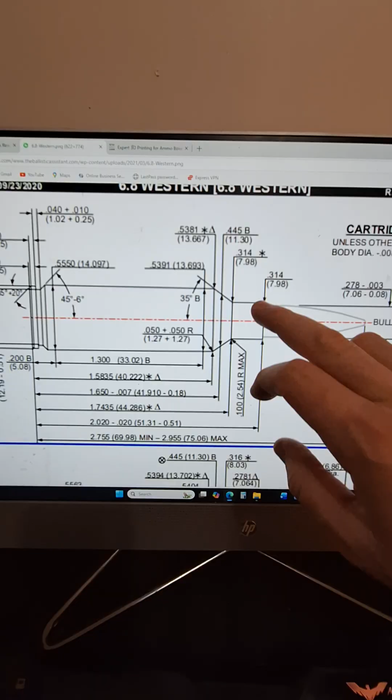I'm using the 6.8 Western schematics from SAAMI as an example to show the numbers of the tolerances I'm talking about. Down a little bit. There we go. So that's the case, and that's the chamber. So from the top of your neck to the bottom of your case,

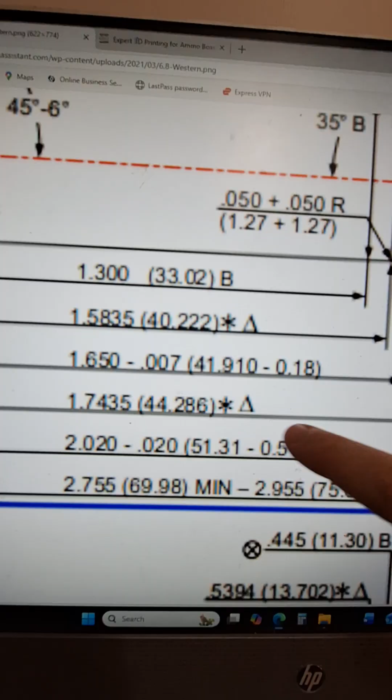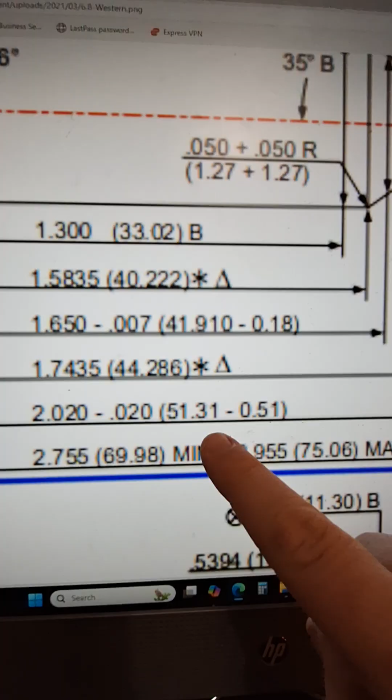notice it says 2.020 through .020. That's your tolerances. You can have a little more and a little less. And here they translate this into metric. So you can have as little as that or as much as that, and you have to stay within a certain tolerance.

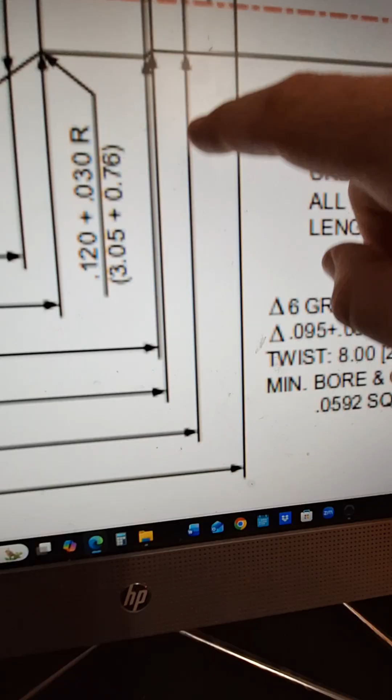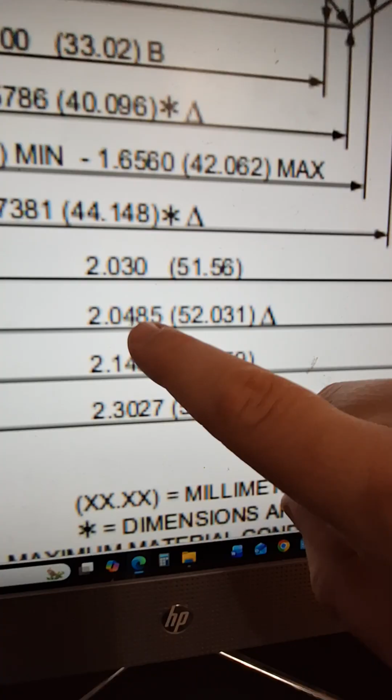And your head space is right here, that little narrow part. It's a tiny, tiny difference. If we follow this down and over to the numbers, 2.030, 2.0485. So you're talking a difference of 185 ten thousandths. It's a very small amount.

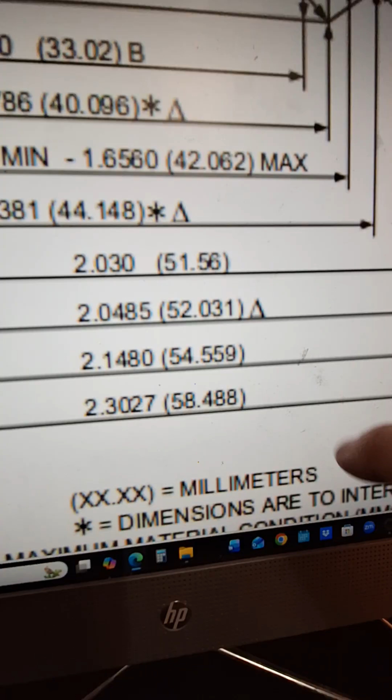Excuse me, 18.5 thousandths is what it ends up being. So you have a small window to have it inside your head spacing. If you shorten it too much, it creates issues, so you have to stay within certain tolerances. Let me zoom back out.

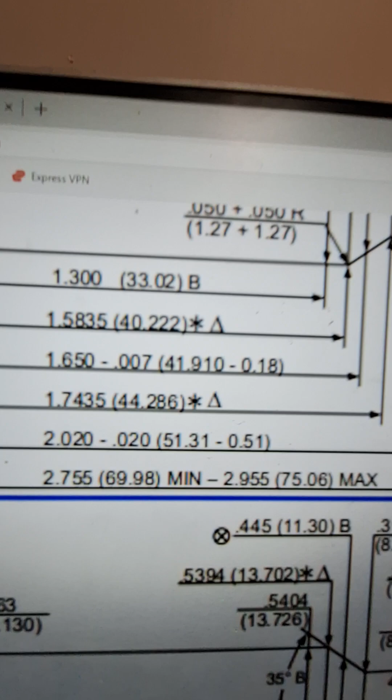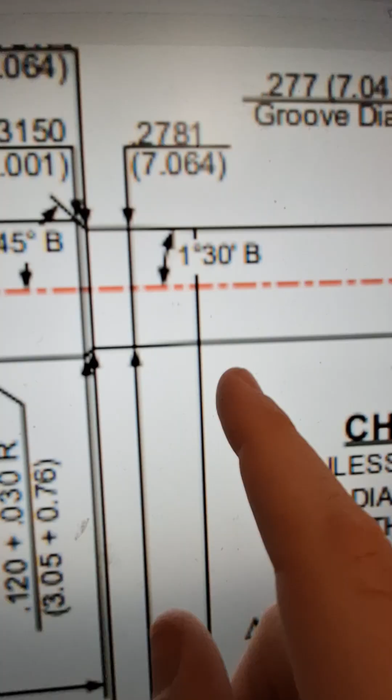They provide the specs there. If you were to drop it below that 2.020 down to, let's say, 2 or 1.9, it creates too much of a gap right there. So that's your lead and then that's your throat.

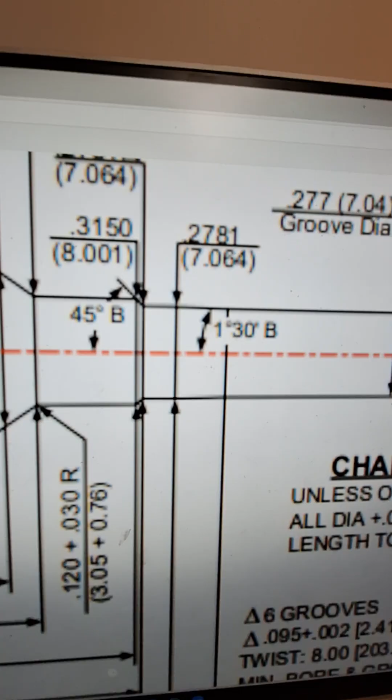If they stay in the same place and your head space stayed the same, and you were to trim this back to a much shorter neck, you create a weird void that can create a massive spike in pressure. And it has. This has been verified many, many times. This is nothing new.

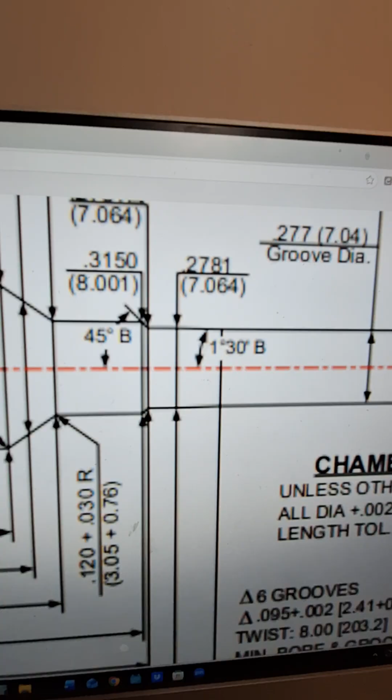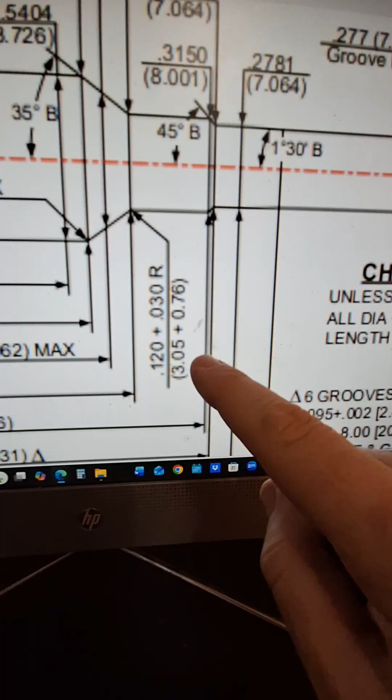So if you just lop off anything, yeah, in theory it stays the same, but you can't really, because you have to factor for staying inside tolerances. Anytime you lengthen or shorten a neck, you have to keep within tolerance. That means when you're making your tooling, you have to factor for the head spacing to stay within tolerance. All of this would move with that, affecting your case overall length. So all these numbers would start changing in order to keep it from blowing up in your face.

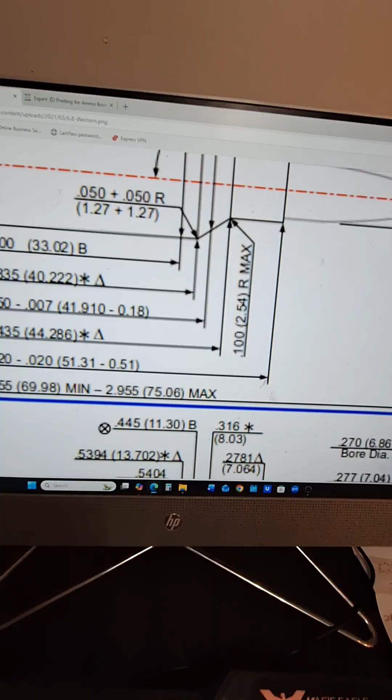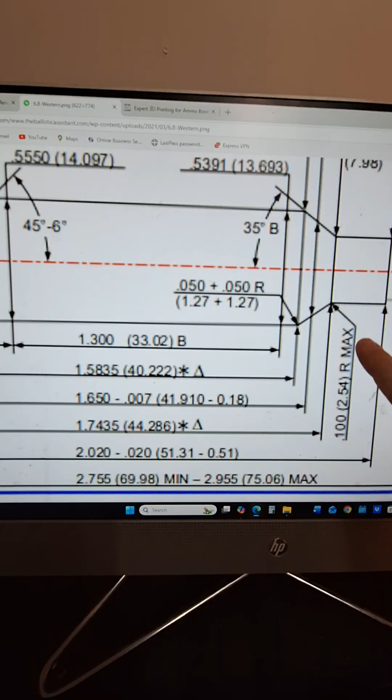That's exactly why it has to move. So here it is. We're going to use this. So let's say your case is 2.020, right? And this gives you a max case overall length of 2.955. If you were to try to shorten, if you were to try to lop off, let's say, let's go with this. So you have your length there, and then to the base of your neck is 1.7435. So if I pull up a calculator, which I have, let's see.

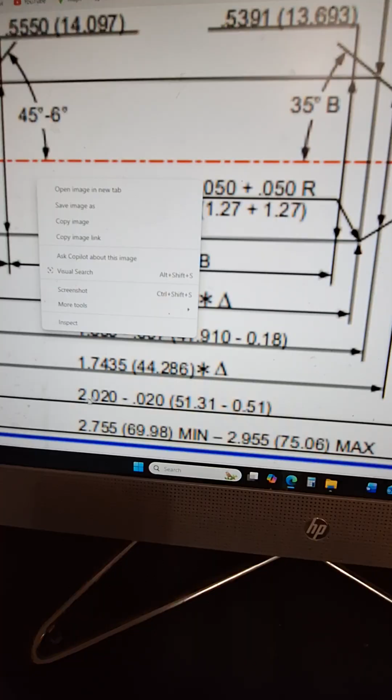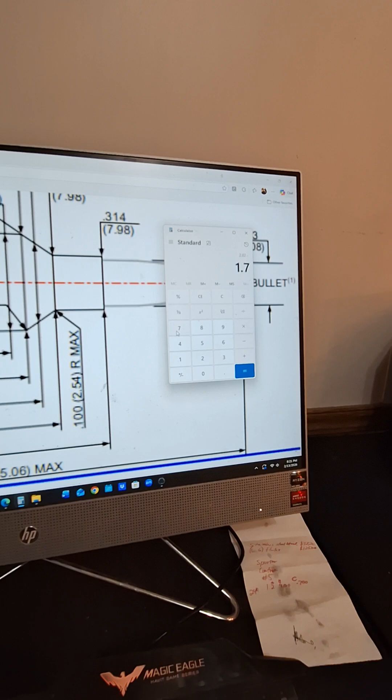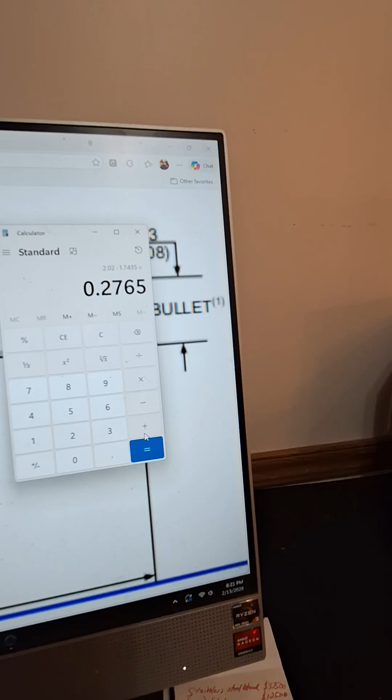Oh, that's not it. Pull up a calculator. So if I have 2.020 minus 1.7435, that gives me a neck length of 0.2765. And let's say I want to take off 4 hundredths. So minus 0.04, that gives me that.

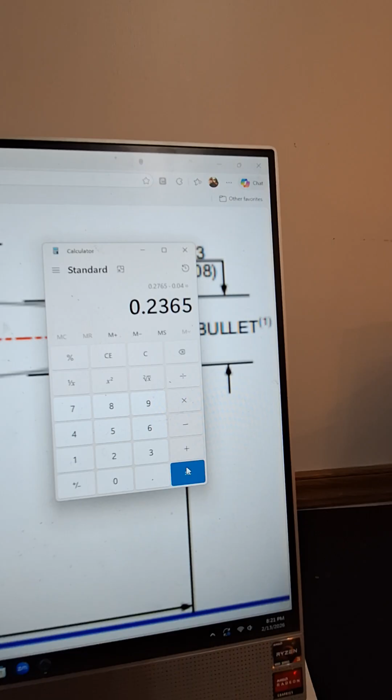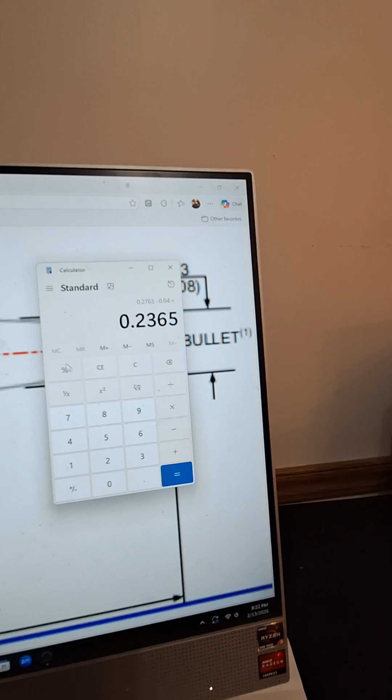Okay? We're at the border of how safe it is to utilize that case inside that chamber. Much more spacing than that can lead to catastrophic failure. Yes, your head spacing matters. You can't just lop off and do that. So let's say we were to make it from, we're going to clear it out. So we have, again, the 2.020 minus 1.7435 equals that, minus, let's say, minus 0.0765. That gives you 0.2. That's a massive difference. Okay?

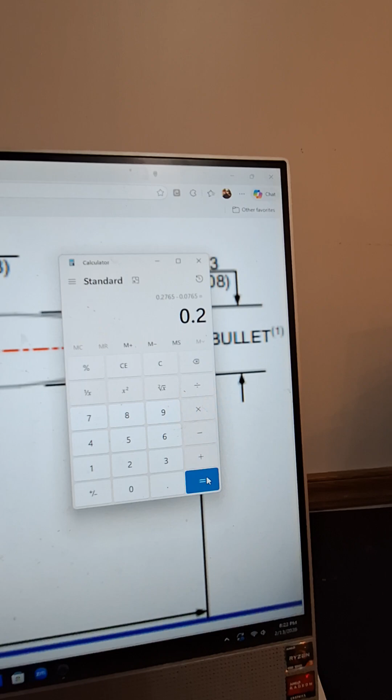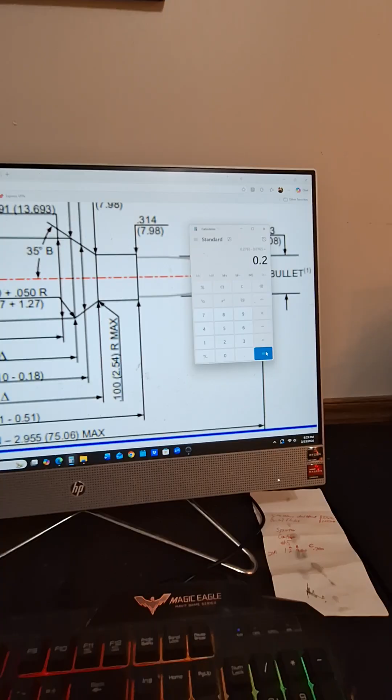That's a massive difference. So yeah, in theory, the bullet stays the same, but you're going to blow your gun up. So go ahead. To the guy who wanted to argue with that, if you want to test that out and you want to do that, go ahead. By all means, go for it. Fair warning, it's a bad idea. I don't think you should. But if you want to argue that you can just simply lop it off and expect the gun to function, you're dead wrong.

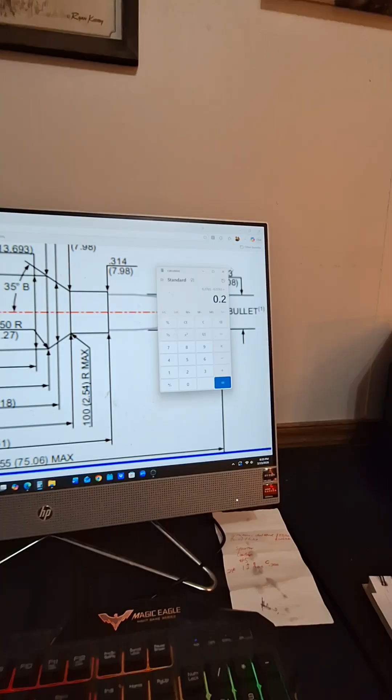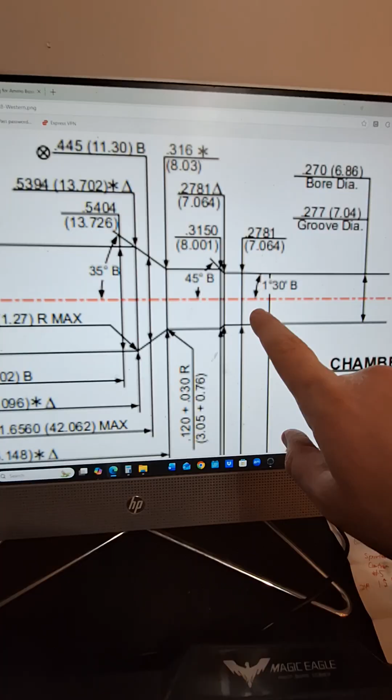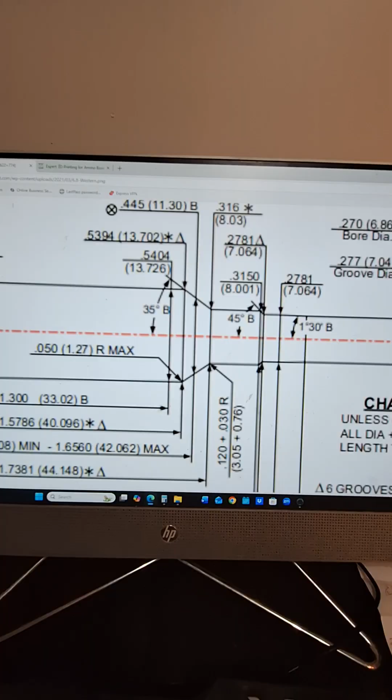And here's another side of it too that you need to think about when you're engineering. Because it's one thing to reload, it's another to engineer. Your tooling all has to be the same. So let me put that down. When you design your chamber, it's not just simply a matter of, oh, they have this tool that comes in here, cuts this. There is some tooling that you can extend your throat a little bit, but not by a whole lot. The vast majority of the reamers that are cut, this is all connected. So when you look at this, your throat, your lead, your head spacing, your neck, your shoulder, and your body are all in one tool. So I can't just simply slap something together and expect it to be okay. There's modifications that have to go with it.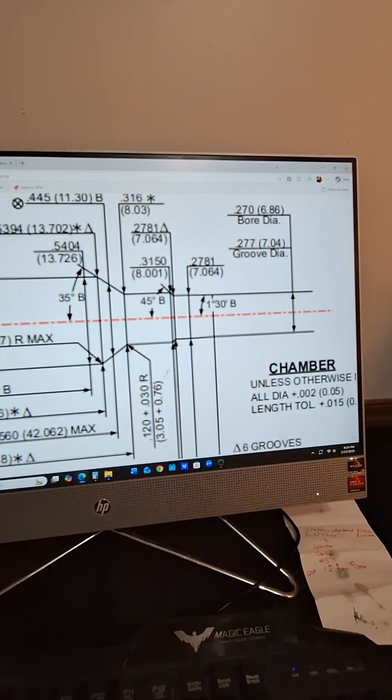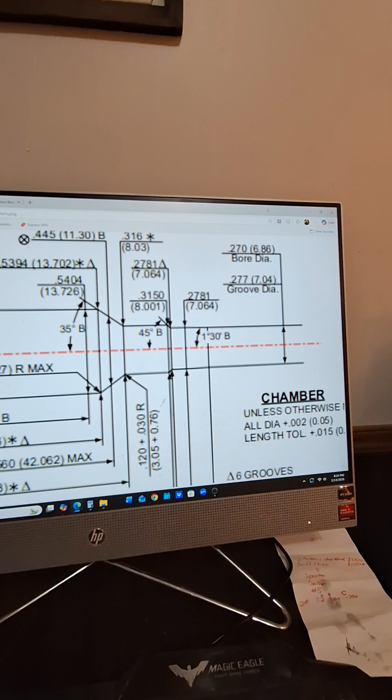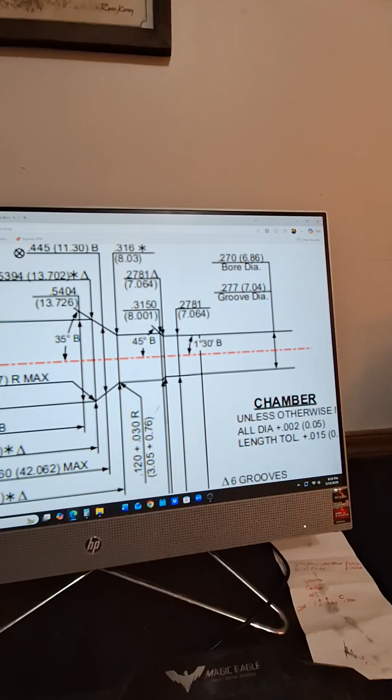So, yeah, if you think you can do this and do it safely, and if you think you can do it better, go for it. I'm on a first name basis with tooling guys that make custom tools for the big names of the industry. And you think I'm worried about what some guy is doing as a hand loader at home? Yeah, not to mention the guy that I'm dealing with has been doing it for 50 years. He's not just a reloader, he's a machinist. So, no, I'm not going to take the advice of somebody who's been reloading for 20 years over the advice of somebody who's been building the tooling and rifles for 50. Yeah, there's a reason why I'm going to stay the course and listen to the advice of those far more experienced. You can't just cut that off.

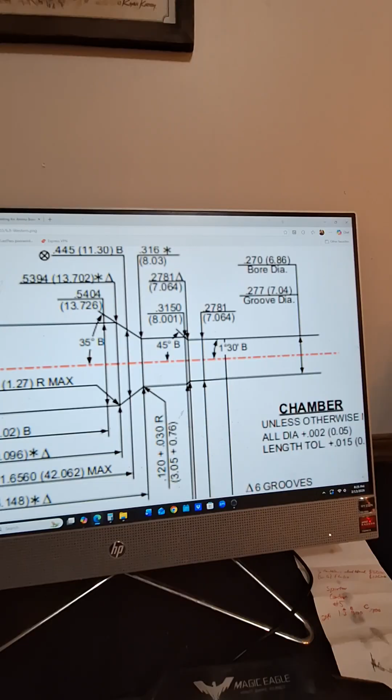That whole lead and throat have to move with that down to keep within tolerances so your gun doesn't blow up in your face. Okay? That's the reality. And when it's all said and done, why would I shorten the neck anyway? Oh, but you're not utilizing the whole neck. How is this a problem? It's not.

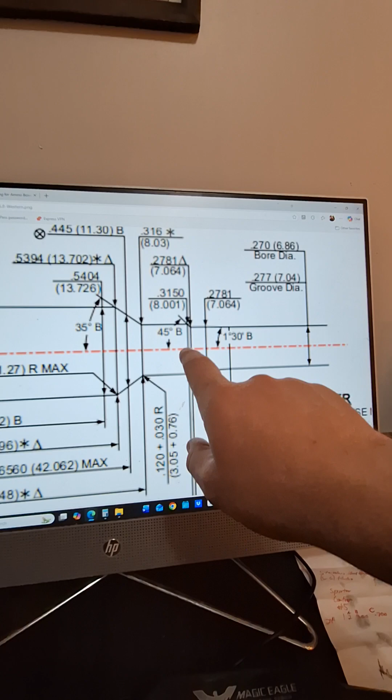Because guess what? If I have a longer bullet, it can seat down a little bit further. If I have a shorter bullet, it still seats over here. As long as I'm doing it where it's not just barely hanging on, that's not an issue. Having a slightly longer neck is not going to be a problem. So, I'm going to continue with it. Not to mention, having that slightly longer neck allows me to load powder all the way up right into there.

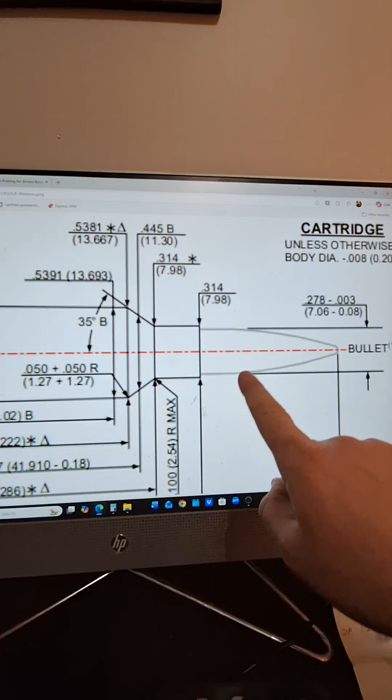I'm going to use the case this time. But see, imagine this bullet comes in, and let's say it's extra long. It can come down into here, not too much of an issue. But let's say I get one that's slightly shorter, and it comes down, let's say the boat tail is right in here. Okay, not a big deal. Let's say it comes in, and then the boat tail starts over here. How is that a problem?

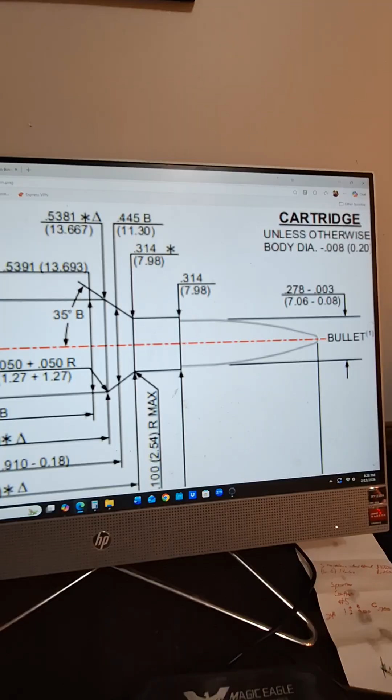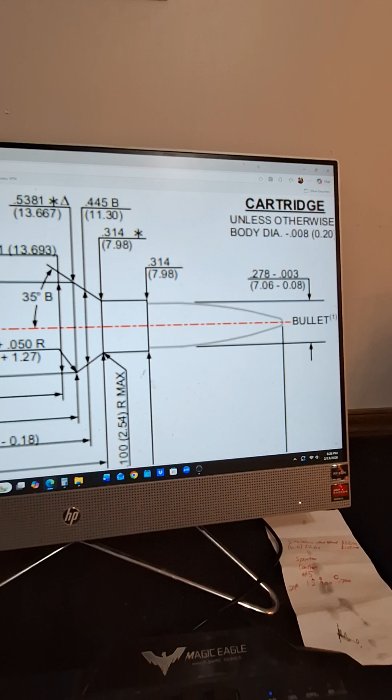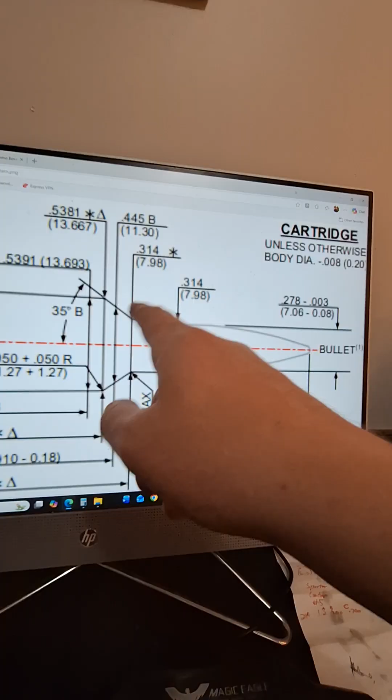If I shorten that neck down, the issue I create is that I don't have a whole lot to grip. That also means I have to then have a smaller window of bullet selection that I can use. Having that longer neck allows me to seat out to a certain extent without having to seat out a ton. And the further I seat out, again, the less advantage I have, because there's only one way to add weight into a caliber. I can't make it fatter. I have to add length. So if I add length, that's one thing. It's easy to add length. But when I start chopping it off and making it shorter, no.

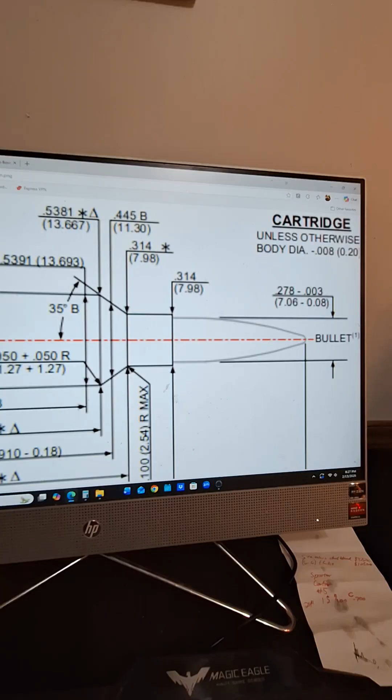The length that's on this 270 that I'm working with to be able to create the new cartridge allows me to seat down into a 130 grain and a 140 grain comfortably. Easy. Okay? So why would I shortchange myself? For someone's crappy opinion? No. This gives me the opportunity to keep things where I have a wide variety. It also allows me to not have to keep adjusting. I can literally fire form my own brass. I have all the advantages of this.

Again, I've been doing a deep dive of the exact details in the machining side of it, not the reloading side of it. So, you can say whatever you want. You're allowed to disagree with me. I don't care. If you feel like you can do better, go do better. As I said, I dare you to go lop off 5 or 6 hundredths off your neck, shoot it, and see what happens. Just fair warning, if you're dumb enough to go do that, it's on you.

So, yeah. Are you going to win this one? No, you're not going to win this one. Because I already know what happens. I've been there and watched guys do it. So, am I going to simply shorten it because somebody has a garbage opinion? No, I'm not listening to that. That's bad advice. So I don't have to seat it down further. I'm trying to do my best to keep it out of the powder reservoir to maximize my volume.

Why is that a problem? Because it's not how you would want to build it? Okay, cool. Good for you. Would you like a cookie? No. Go build your own if you're so dedicated into this. Oh, but you're not, because you're not dedicated into this. So, to those who are and understand and have been there and understand exactly what I'm talking about, I appreciate you. To the guys who want to come in and try to just poo-poo on this because they're too stupid to understand, there's other channels. Go elsewhere.